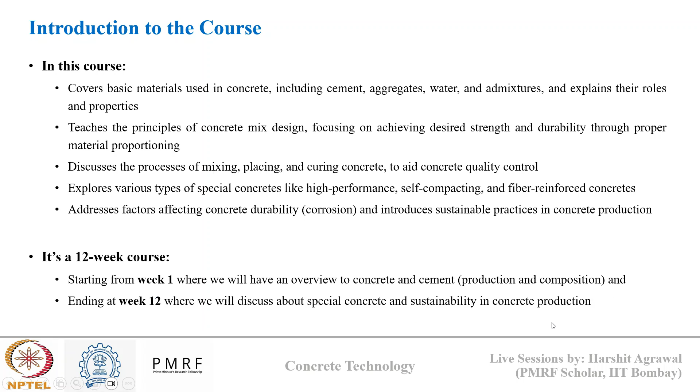It's a 12-week course starting from week 1, where we'll first have an overview of concrete and cement based on its production and composition, and we'll end with week 12 where we'll discuss special concrete and sustainability in concrete production.

So the course is divided into 12-week content. Week 1 is basics of concrete and cement. Week 2 will go on properties and testing of cement. Week 3 will be about aggregates and chemical admixture. Week 4 will be about mineral admixture. Week 5 and 6 will be about mixture design of concrete.

Then in week 7, we'll come into production and quality control. Week 8, we'll talk about mechanical properties of concrete. Week 9 will be about durability properties of concrete related to creep and shrinkage. Then in week 10, we'll talk about rebar corrosion.

Week 11 will come to special purpose concreting, mainly high strength concrete and self compacting concrete. In week 12, we'll talk about fiber and roller compacted concrete, and we'll talk a little bit on the sustainability point of concrete.

Okay, so let's start with week one.

We all are well versed with the fact that in the present world, concrete is the most widely used construction material, and there are facts which support this statement. Fact one: it is the second most consumed material on earth after water. Fact two: more than 5 billion tons of concrete is consumed every year.

Now, what makes concrete so special? Why is it used so much? It is because of its five key characteristics, which make concrete the most widely used material.

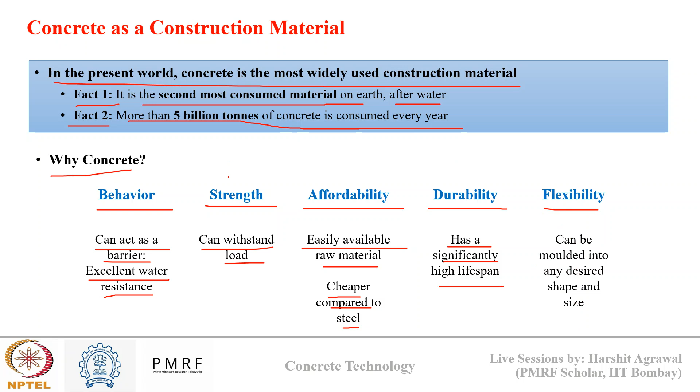Fourth, durability: it has a high lifespan, so any structure made with concrete has a very good life cycle. And fifth, flexibility: we can mold concrete into any desired shape and size, whatever we want. So these five key properties make concrete such a commonly consumed material.

Now when we talk about concrete, how are we defining it? What is concrete? Concrete is nothing but an artificial stone-like mass, which is made by mixing several materials - binding materials along with aggregates, water, admixture - in a specific proportion. When these materials are mixed together in a fixed proportion, we get a stone-like mass, and this stone-like mass is what is known as concrete.

If we write this as a formula, concrete equals binding material plus water plus fine and coarse aggregate plus admixture, which is an optional entity. In layman terms, concrete is a material which appears to be a flowable slurry kind of thing in the start, but over time it will harden and set into a definite stone-like mass, which can resist any kind of loading action as per requirement. So this is how we can define concrete.

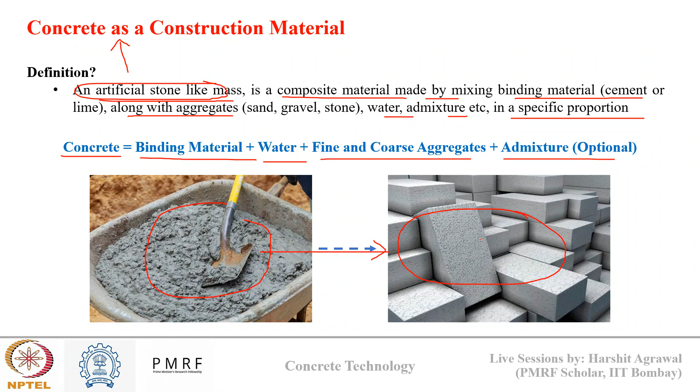Now, if we see different components of concrete - the binding material, water, aggregates and admixture - each component has a very specific role in concreting, and that's why studying each component separately is important to understand the composite action of concrete. So let's start with this equation of concrete as a mixture of binding material, water, aggregate and admixture.

In this, the binding material is the main element of the concrete mixture, and this gives us the strength that we need from concrete, and it binds all the ingredients of concrete together into a specific shape. The most commonly used binding material is cement.

Now, how does this binding material give strength to concrete? It reacts with water, which contributes in reacting with the binder as well. It provides the workability to make a paste which hardens over time, giving us this stone-like substance called concrete.

Now, apart from binding material and water, we have aggregates in concrete, which are inert material. So we use sand as fine aggregate, and we use crushed stones or gravels as coarse aggregates. What is the role of aggregate in concrete? They provide dimensional stability to concrete.

Why are we calling it dimensional stability? Over time we'll understand these things, like why there's a need of aggregate, why not just use cement and water - using cement and water we can make concrete. So over time you will understand the need of each of these components.

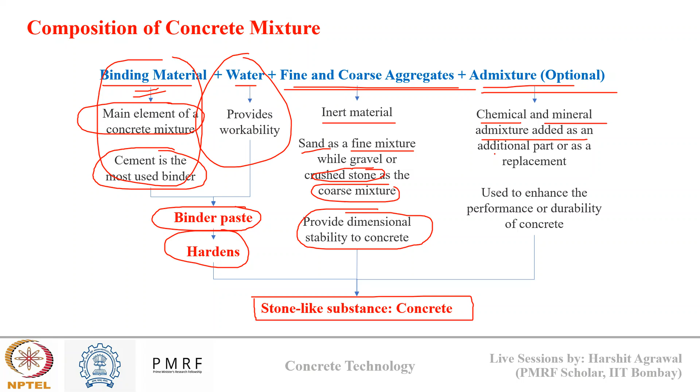Then there is an additional component known as admixtures, which are optional. There are chemical and mineral admixtures that are also added as a part or as a replacement of these materials, and they are used to enhance the performance or durability of concrete. Based on the type of concrete we want, the strength, the durability, or the purpose, we can adjust the proportions of these raw materials to get the final concrete product that we want. So all of these components combine together to make a stone-like substance which is known as concrete.

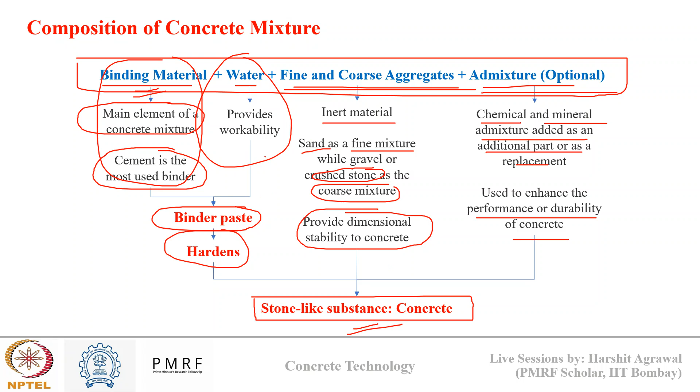Based on the proportioning of various ingredients used in concreting and the admixture content, we can classify concrete into different types. There is regular concrete, also known as plain concrete. Then there is reinforced concrete, high strength concrete, high performance concrete, self consolidating concrete, vacuum concrete, shotcrete, compacted concrete, glass concrete, asphalt concrete, rapid strength concrete, polymer concrete. Right now, as per the list, there can be 23 different types of concrete listed.

Among these listed concretes, the most commonly used is reinforced concrete. As we progress in the course, we'll understand that concrete is a brittle material. It has high compressive strength, but very low tensile strength. In actual application, the loading acting on a structure includes both compressive and bending or tension loads. Since concrete is weak in tension, we need some element inside concrete that can take the tensile load, and that's why we embed steel reinforcement inside concrete. So concrete takes the compressive load, steel reinforcement takes the tension load, and they combine to make a composite material used for construction purposes.

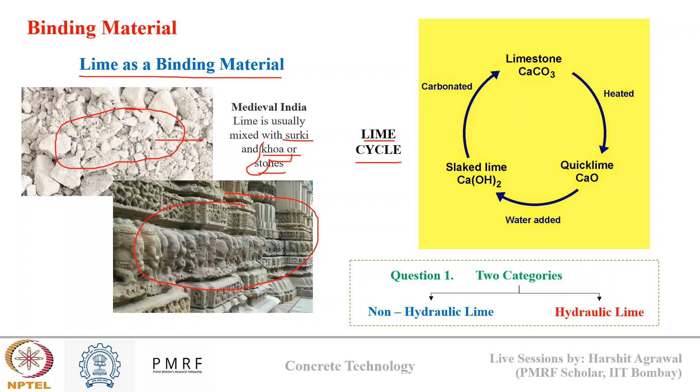All these medieval structures you see are made of lime mortars. So if we simply understand how lime was used as a binding material, we need to understand something known as the lime cycle. Lime as a binding material is produced through this lime cycle.

Limestone, which is a sedimentary rock present naturally, is heated up to 600 degrees Celsius to produce quicklime, known as CaO. In this quicklime, when we add water, it converts into slaked lime, which is Ca(OH)2. This slaked lime reacts with CO2 present in the atmosphere to harden back into limestone, which gives us the definite structures we want. Now, if we heat this limestone again, we'll form quicklime. So we can again produce lime, and this makes the cycle of lime durable, reusable, and eco-friendly in construction.

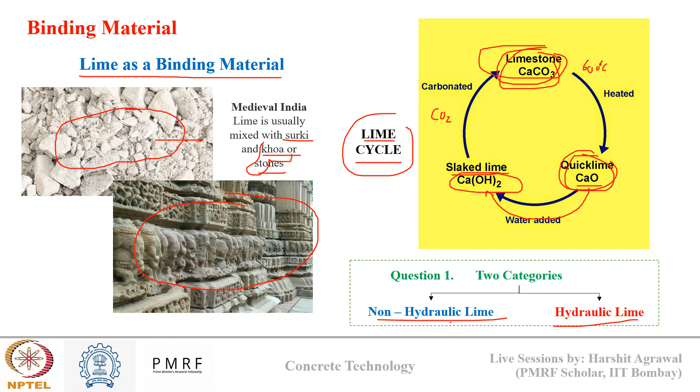Based on the source and reactivity of lime, there are two categories of lime: hydraulic lime and non-hydraulic lime. Can anyone tell me the difference between these two? What is hydraulic and what is non-hydraulic lime? Apart from this question, also think about these two extra questions: which of the following properties is the weakness of lime, and what is one of the modern applications of lime as a construction material? Just think about these three questions for discussion, and in the meantime, if you have any doubts, you can ask now.

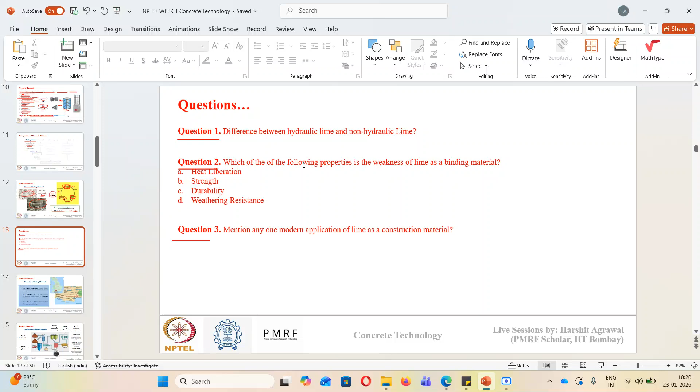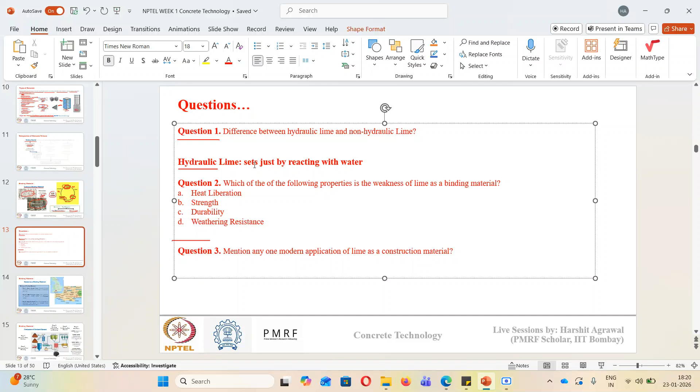Okay, so let's discuss the first question. The one who answered it was correct. So when we talk about hydraulic lime, it is something where it sets just by reacting with water. It can also set by carbonation, but it sets also by reacting with water. How? Because it has certain impurities present in lime which can make lime react with water and form certain products which can gain strength over time. This was something which was used as a basis for the production of modern cement. This hydraulic nature of lime gave the idea behind the making of modern cement.

And then there is non-hydraulic lime. As the name suggests, non-hydraulic lime is something which won't set just by reacting with water. It sets only by reacting with CO2 in air, forming CaCO3. So this is the difference between hydraulic lime and non-hydraulic lime.

Second question: which of the following properties is the weakness of lime as a binding material? Can anyone tell me? See, weathering action will be the common answer for everything, for every kind of binder material. Weathering action is a weakness for lime also, cement also. The one weakness that was discovered for lime, why lime was discontinued, why cement came, why we are not using lime now also, why there was a need to produce cement.

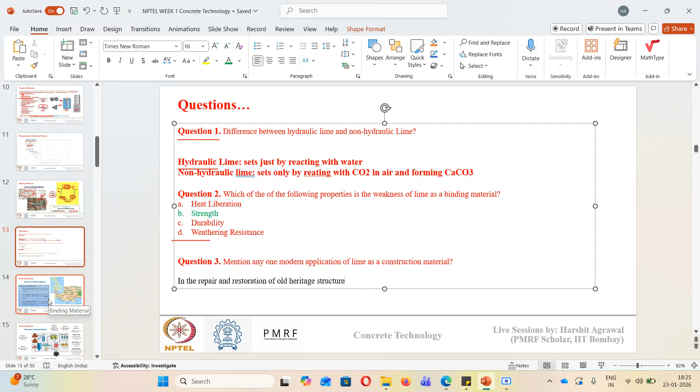Okay, now after lime, let's move on to cement as a binding material.

Let's first explore the history of Portland cement, how it came about. The history of Portland cement is made of three key facts. Fact number one: Louis Joseph Vicat. In the early 19th century, this scientist first prepared Portland cement by mixing limestone and clay, which laid the foundation of the modern cement we use today.

Then in 1824, a scientist named Joseph Aspdin patented this hydraulic cement. So first we talked about hydraulic lime, from which the idea of cement came, and then Joseph Aspdin patented this idea of hydraulic cement, which was termed Portland cement later on.

Why the name Portland? It was chosen because the cement resembled the properties of Portland stone, a type of limestone present in a region known as Dorset in the UK. On the map of the United Kingdom, there is a region called Dorset, and within Dorset there is an area named Portland. The limestone present in this area resembled the properties of the cement that Joseph Aspdin patented, so it was named Portland cement. This is how the name came about.

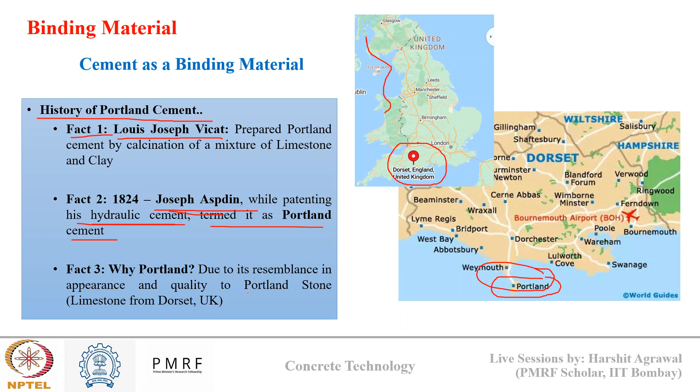Now in the modern age, how do we produce Portland cement? In cement production there are five key stages. Stage number one is the crushing of raw materials.

It all begins with crushing of raw materials like limestone and clay, along with some impurities of iron oxides. Once crushed, they are stored in raw mill silos, which are big storage bins you can see on cement production sites.

Then the second step is grinding, proportioning, and blending of the raw meal. The crushed material that we have stored is now ground and blended in precise proportion, in specific quantities, and then blended to create a homogeneous mixture.

Then the third stage is preheating of raw meal. Once this mixture is proportioned, it is preheated using hot gases in a preheater tower. The need for this preheater tower is to reduce energy consumption in the next stage of cement production, so initially the material is preheated before sending it to the actual heater.

Now the fourth stage is the kiln phase, the main phase of cement production. The preheated material from stage three is heated to a high temperature in this rotary kiln, where all the chemical reactions take place to form the final product, known as clinker.

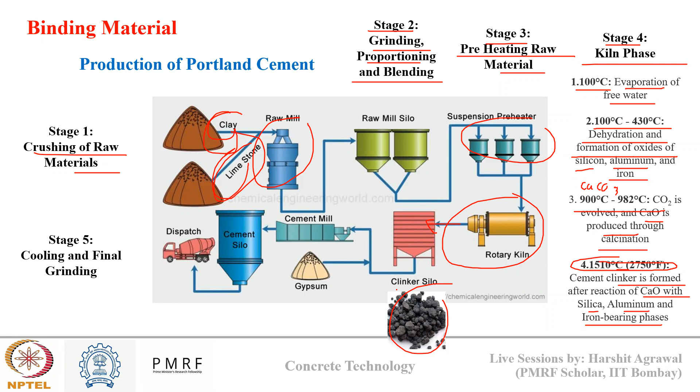Once we get out of the kiln phase, stage five is cooling and final grinding. The clinker from the rotary kiln is cooled down, gypsum is added to the cooled clinker, and it is again ground into fine powder, which is known as cement. This is stored in big containers known as silos, and it is dispatched for packing and production.

So this is the entire cycle of production of cement: starting with crushing of raw materials, grinding, proportioning, preheating, kiln phase, and final cooling and grinding. This cooling phase is very important; later on we'll see its importance through one question.

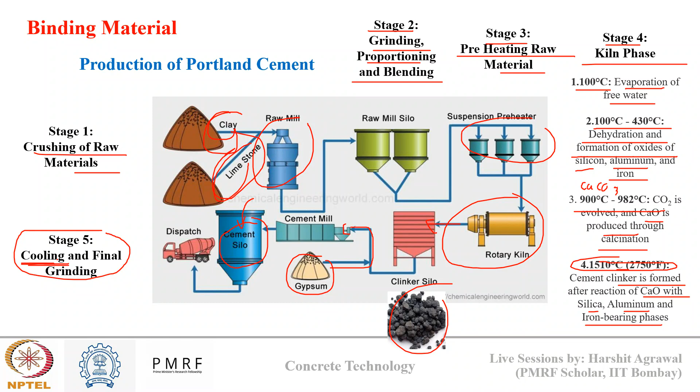Now, since we have talked about both cement and lime and how they are produced, try to answer these two questions: what is the difference between hydraulic lime and cement? Hydraulic lime also reacts with water and sets; cement also reacts with water and sets. So what is the difference between the two then?

No, it is not like that. We need to heat lime to decompose it to use it again. It is not like if we add water again, lime will decompose. Because CaCO3 is formed, and CaCO3 can't react with water, so we can't make it active again.

Degree of setting, hmm, not the answer I am looking for. Hydraulic lime sets so slowly, whereas cement sets fast. Can you tell me the reason? Although we'll discuss this later on, but still.

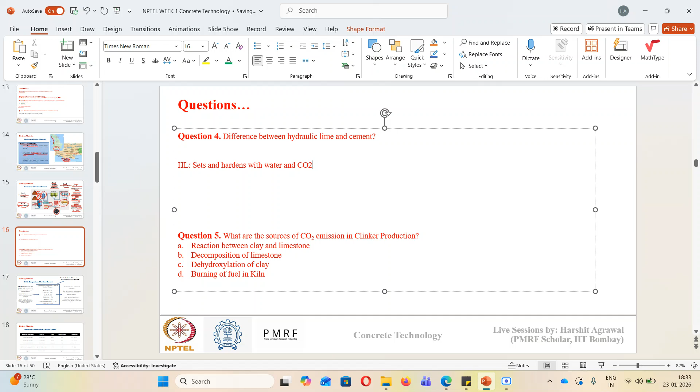So when we talk about hydraulic lime, we know it sets and hardens with water and CO2, both can make hydraulic lime set. Whereas when we talk about cement, it sets because of the hydration reaction with water. That is the only source for cement setting.

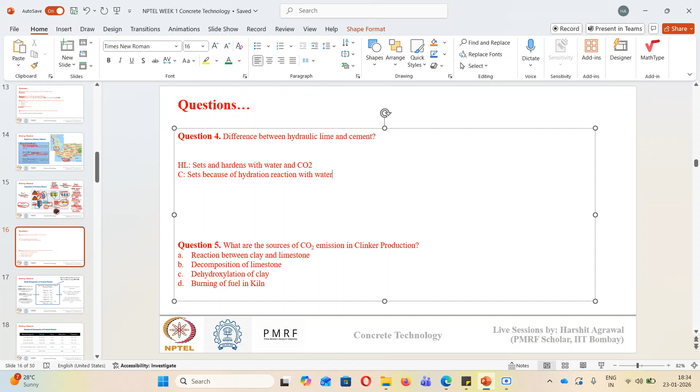Now, one more point that is very important to understand about hydraulic lime is how it is produced. Hydraulic lime is produced by heating limestone and clay till 700 to 800 degrees Celsius only, whereas in cement, we are heating limestone, clay, and impurities till 1500 degrees Celsius.

And this is very important. This is the point which makes limestone, hydraulic lime, and cement differ from each other. Because when we heat it till 700 to 800 degrees Celsius, the oxide composition that we get in hydraulic lime is different from the composition we get in cement.

So I will just give a hint on this. In hydraulic lime, we get C2S as the major component, whereas in cement we also make C3S. This C3S is responsible for early strength, whereas C2S is responsible for slow strength gain. That's why hydraulic lime has slower strength gain over time, whereas cement has faster strength gain initially also.

So this point we'll see later on also, what is C2S, what is C3S, and everything. But for now, just to answer this question, just remember this point: it is about the way hydraulic lime is produced and the way cement is produced.

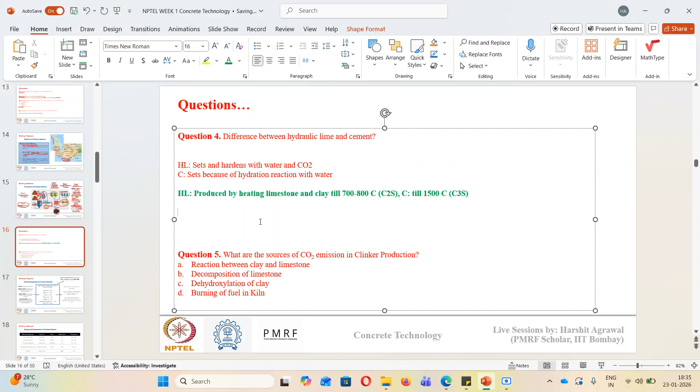And the third point, which was told by someone, is that hydraulic lime has lower strength compared to cement. So these three key points are there when we compare hydraulic lime and cement. And why, what is the reason behind this lower strength? Again, this composition, C2S and C3S. So later on when we talk about hydration of cement, it will be clear to us.

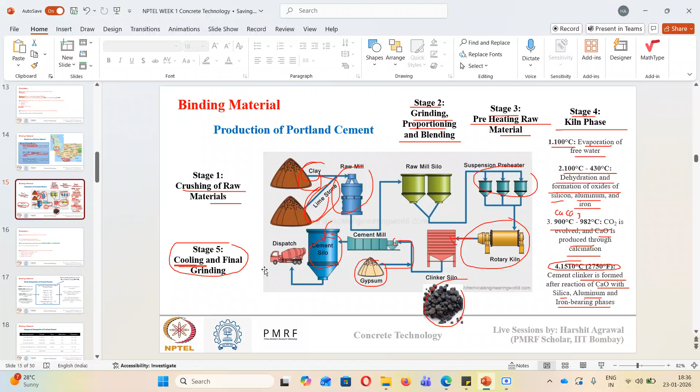So just try to answer the fifth question now: what is the source of CO2 emission in clinker production? When we talk about this production phase, from where is the problem of CO2 emission coming? We talk a lot about replacing cement with certain sustainable materials. What is the problem with clinker production which makes cement such a hazardous material for nature? From where is that CO2 emission happening?

What is the age of cement, and is there any benefit of fresh 1 week old cement compared to older cement?

Old cement will be carbonated initially, so it won't react with water that efficiently, and fresh cement, it is less so. Old cement will be hydrated, not carbonated, sorry, it will be hydrated. So what happens is, if we leave cement open in ground or open to atmosphere, it absorbs water from the atmosphere and it hardens. Once it has hardened, it won't have the ability to bind material together because it has already absorbed water and hardened.

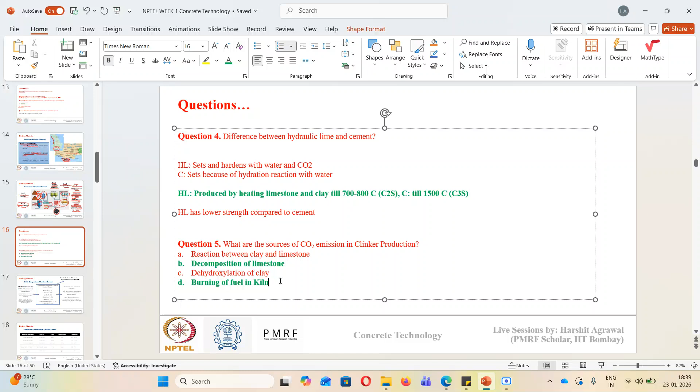Let's go back to this question. Yes, the correct answer is B. Decomposition of limestone releases CO2, and the burning of fuel in the kiln phase also releases CO2. These two are the major problems when we talk about cement production, and why we are looking for replacement of cement, because of these two reasons. They are the major contributors to CO2 emission in the world right now. And to reduce the use of cement, we are going towards sustainable construction practices.

Now to understand the chemistry behind what we obtain from this kiln phase, what we call clinker, we need to understand the oxide and compound composition of Portland cement. After passing through the kiln phase, limestone and clay, upon exposure to higher temperature, form different oxides of calcium, silica, and aluminium. Limestone is the source for calcium, and clay is the source for silica and aluminium. Along with this, we also add some iron impurities in the initial raw mixing, which is the source for iron oxide. So all of limestone, clay, and impurities, upon exposure to high temperature, convert into different oxides of calcium, silica, aluminium, and iron after liberating CO2 and water.

For Portland cement, the general composition of oxides present in the clinker is of this order: calcium oxide is around 60 to 67%, silica oxide is around 17 to 25%, alumina oxide is 3 to 8%, iron oxide is 0.5 to 6%, magnesium oxide is 0.5 to 4%. There are alkalis present, which is 0.3 to 1.2%, and there are sulfates also, SO3, present in the range of 2 to 3.5%.

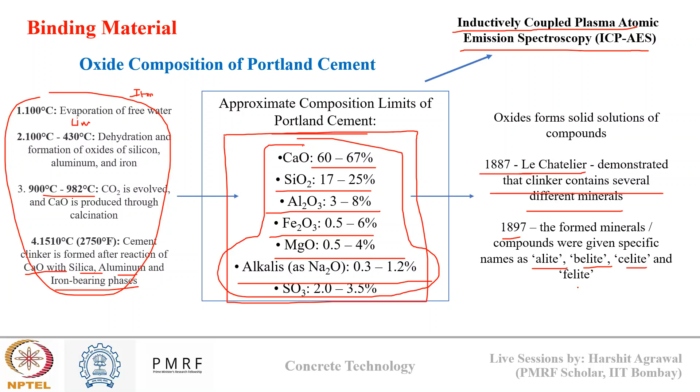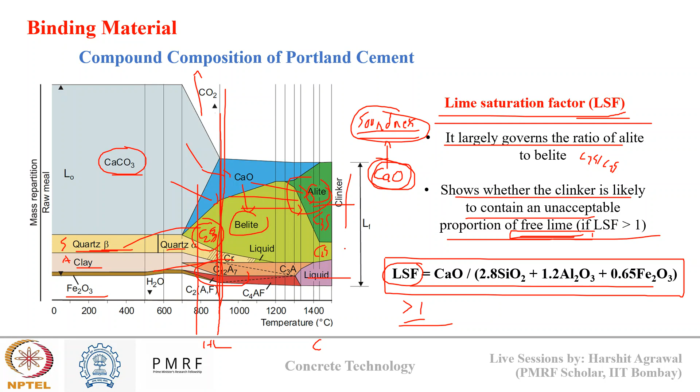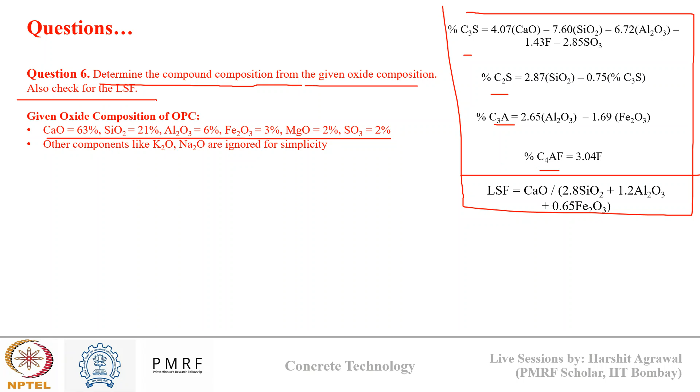Okay, so just give it a try. How to use this equation? I have a question for you now, where you need to determine the compound composition of the cement for the given oxide composition. This is the oxide composition that I have given you. Use these sets of equations and determine what will be the proportion of C3S, C2S, C3A, and C4AF. Also check the lime saturation factor - is it greater than 1 or less than 1?

So just do this calculation quickly, and in the meantime if you have any doubt in the discussion we had till now, you can ask.

Okay, I see multiple questions.

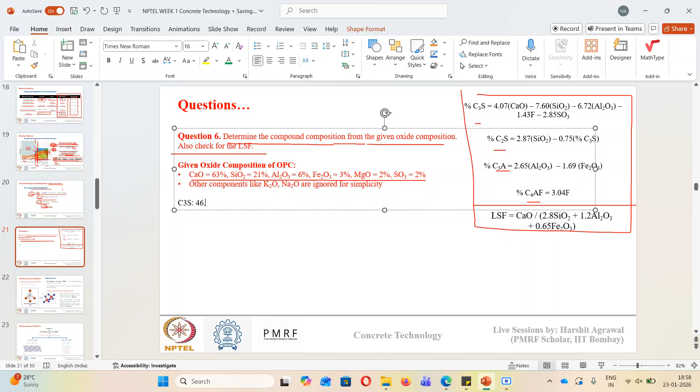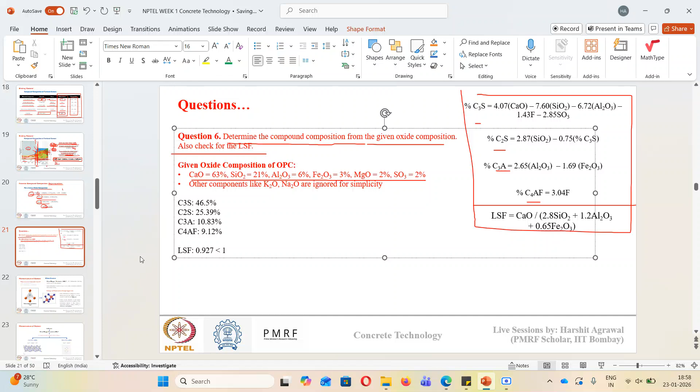Lime saturation factor is correct, it is 0.927, between 0.92 to 0.93. For this question's calculation, I will just write the answer here, and you can do the calculation later on and verify. So C3S content will be around 46.5%, C2S content will be around 25.39%, C3A content you will get around 10.83%, and C4AF content will be around 9.12%. Lime saturation factor comes out to be 0.927. Since it is less than 1, we can say that the cement batch is suitable for use.

Now let's move ahead and try to understand what is happening inside cement and how it hydrates. Till now we know the composition of our Portland cement. Now we have three critical questions that we need to answer.

First, why are certain compounds formed? Why is C3S forming, why is C2S forming, why is C3A forming? Then, why is cement reactive - what is the reason which makes cement react with water? And then, how does cement react with water? Answering these three questions will clear all the major doubts that were asked recently. So to understand them, we need to understand the microstructure of cement.

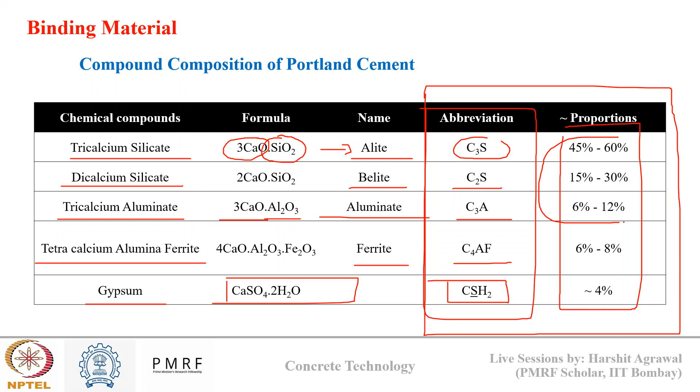First we'll start with why certain compounds are formed. Now we know that cement mainly has two phases, silicates and aluminates. So we saw C3S, C2S, and we saw C3A. In this proportioning chart, we can see the major proportion is occupied by these two phases, silicates and aluminates. So let's first talk about the silicates, C3S and C2S.

When we talk about silicate structure, silica is in the form of silica-oxygen tetrahedra, SiO4 4-negative. This is the fundamental building block for all silicate minerals. Each tetrahedron has one silicon atom, which is covalently bonded by four oxygen atoms, and it has a free charge of -4.

In this tetrahedral structure, there are four unbalanced charges present right now. The presence of these unbalanced negative charges on the oxygen atom leads to the ability of silica to show linkage and polymerization through oxygen bonds. A system will be stable when all charges are balanced, so this silica tetrahedra will try to balance its unbalanced charges, and for this reason it shows linkage and polymerization - multiple chains of silica will try to link with each other.

This single unit is known as a tetrahedron. If this tetrahedra arrange in three-dimensional space in a periodic pattern, we get a crystalline material. So if this is arranged regularly in 3D, we'll get a crystalline material like quartz, which won't be reactive.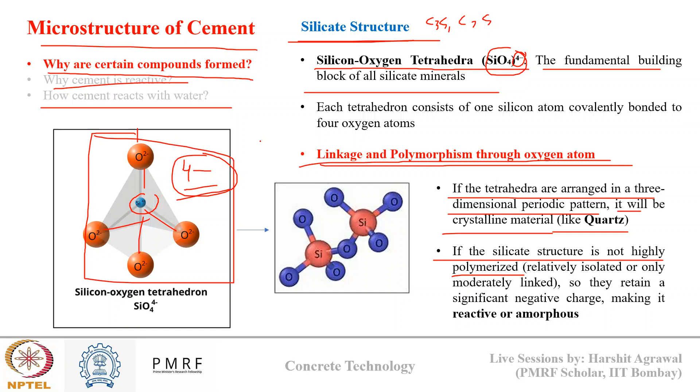However, if this silicate structure is not highly polymerized, if it is not regular along all three directions and remains relatively isolated or moderately linked, not completely linked, then it will have some negative charge still unbalanced. The presence of these unbalanced negative charges make silicate reactive and amorphous. Anything which is reactive is known as amorphous in nature, and anything which is not reactive is crystalline in nature. When we talk about sand, it is also composed of silica.

But sand is not reactive because it has a 3D structure of silicate - this silica tetrahedra is present in three-dimensional space, arranged in three-dimensional space, and this polymerization is 3D in nature, that's why it is crystalline material. However, in cement, the silica tetrahedra is not 3D in nature, which makes it amorphous. There are still unbalanced charges present on the silicate mineral, which makes it reactive towards calcium.

So if we try to understand what cement chemistry is, how it is fundamentally controlled by the silica tetrahedra and its arrangement and charges, then the next question we need to understand is why C3S and C2S are formed.

We know that there are negative charges which are unbalanced on the silica tetrahedra. These charges must be neutralized by some compound to form a stable phase. In cement clinker, the calcium ions balance these negative charges. In belite, there are two calcium ions giving us +4 charge, which balances the -4 charge present on the silica oxygen tetrahedra, resulting in the formation of C2S. You can see this is silica, these are four oxygen atoms with four negative charges, two grouped with calcium, other two grouped with calcium, and we get C2S.

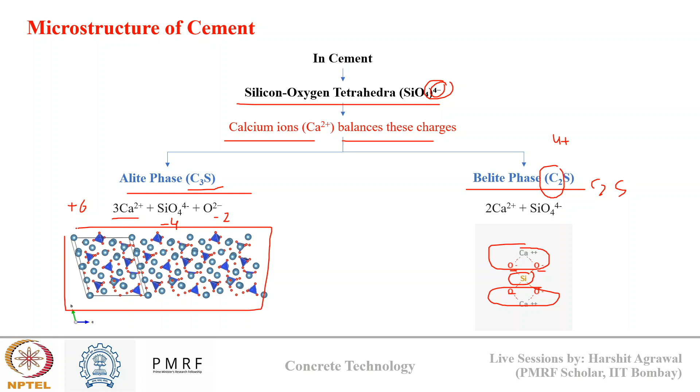The structure of calcium alite is a little complex. It is not very oriented, it is distorted, and it is imperfect in nature. There are multiple sites which are amorphous in nature, and they have poor packing at the structural level, which makes C3S unstable. That's why it is formed at very high temperature, and why it is more reactive towards water, because it is still unstable - not perfectly balanced, not perfectly oriented, it has multiple orientations and multiple structures present in its nature, which is the reason why it forms at very high temperature and why it is very reactive towards water.

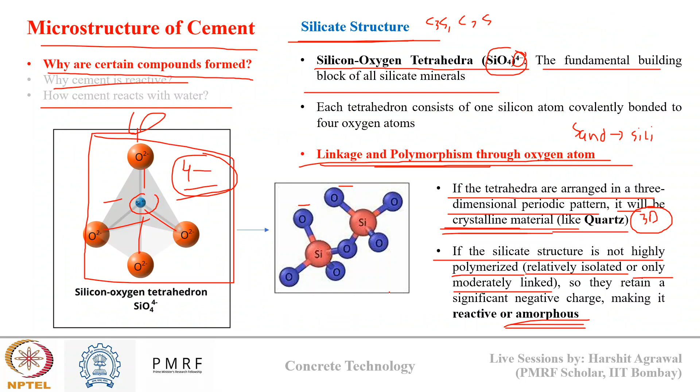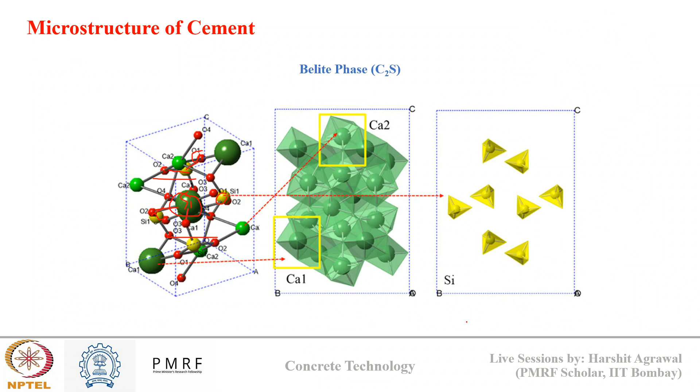So more the polymorphism, more the crystallinity in the system, lower will be the reactivity. Lower the polymorphism, more the reactivity, because more is the amorphousness in the system. That is the difference between aluminates and silicates, and within silicates also between C3S and C2S.

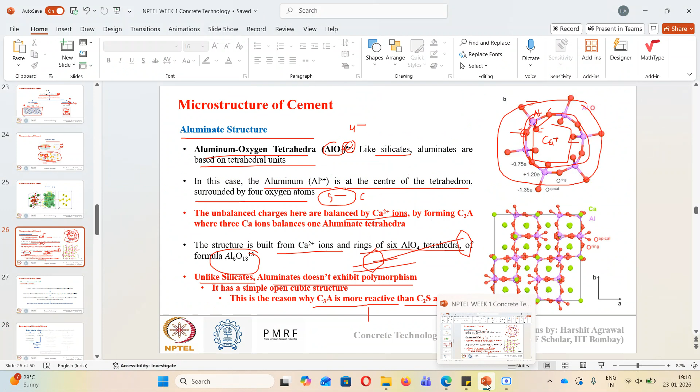Is everyone clear with this atomic structure and how it is oriented? I'll suggest you listen to this lecture once again so you get more clarity about what I have spoken. Any doubt in this part? This PDF will be available to you.

Polymorphism means linkage of each unit. So here, this is one tetrahedra, one silica tetrahedra, one unit of SiO4 4-negative. Now to balance this 4-negative charge, what happens? This oxygen links to another silica. Then there are oxygens of that silica. This oxygen links with another tetrahedra unit, then this oxygen links to one other silica, and so on. So this linkage of each single unit is known as polymorphism.

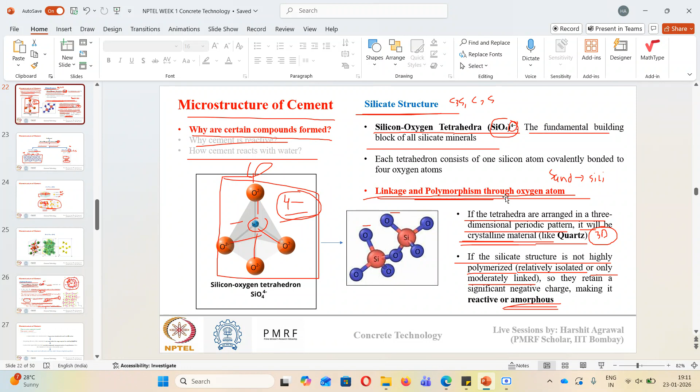The role of gypsum we'll understand slowly when we talk about hydration of cement.

When we talk about composition, we give a range, not very specific values like 50%, 40%, 30%. There is a range in which cement composition can vary. So if C3S content should be in the range of 40 to 60%, some cement company will manufacture cement with C3S at 58%, while some will manufacture cement with C3S as 44%. That's why differences come from company to company, and that's why grade differences also come. F is for Fe2O3 in that equation.

Polymorphism will reduce the reactivity. Why is sand also made of silica, but it is an inert material that doesn't react with water? Because of the 3D polymerization present in sand. Sand has a silicate structure with polymerization in a 3D network, which makes it very less reactive. When something is not reactive, we call it crystalline in nature—crystal means it has a perfect structure, perfect polymorphism in 3D. That is a crystalline material. Amorphous material is something which has unbalanced charges, which gives it the ability to react. Cement has the ability to react, while sand doesn't.

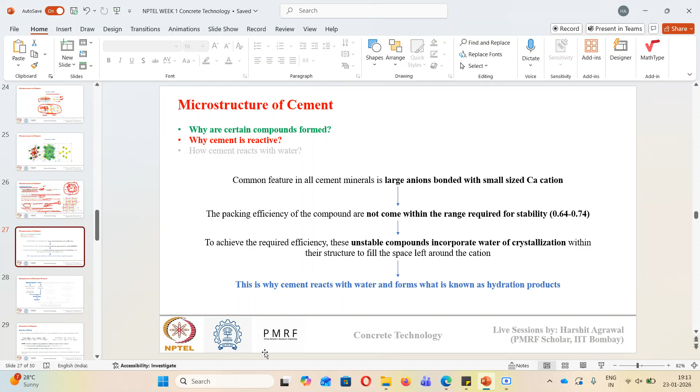Okay, that was the first question. Now we know how certain phases are formed, why C3S is forming, why C2S is forming, why C3A is forming. But why are they reactive? Why is cement reactive? That is the second question we need to answer.

If you see, one common feature in all cement minerals is that it has large anions bonded with a small cation. So we have SiO4 4-negative units or AlO4 5-negative units which are bonded to Ca2+ cations. These are large anions and this is a very small cation. So if we see the atomic size, the anion has a very high size, while the cation has a comparatively much smaller size.

Due to this large anion, if we see a simple cubic structure, these anions occupy the corner positions of the cubic unit. Due to their larger size, they hinder the packing of each other—they won't allow the anions to pack close to each other. Since they don't have good packing efficiency because of their larger size, the packing efficiency of the compound that is finally formed won't come in the required range of stability. To form a very stable compound, we need a packing efficiency of 0.64 to 0.74. Due to the presence of large size anions, the packing efficiency is lower than this, and this is why cement becomes reactive. So how does cement improve its packing efficiency?

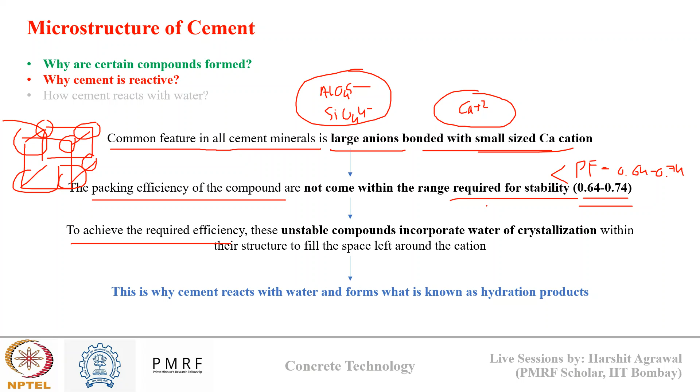To achieve this efficiency, these unstable cement compounds incorporate water of crystallization. Cement reacts with water to fill the spaces left over between cations. This reaction of cement with water, and this incorporation of water of crystallization, produces what is known as hydration product, and the reaction itself is known as hydration reaction. So the main reason is to improve the packing efficiency. Due to the presence of large anions and small cations, there are a lot of spaces left within a unit cell which are not occupied, reducing the packing efficiency. To improve on that efficiency, cement reacts with water to form hydration products.

The entire unit, C3S, C2S, they are not stable phases. They have very low packing efficiency, and that lower packing efficiency makes them reactive towards water because they want to achieve stability. Every atom always wants to achieve the lowest energy state, and that lowest energy state is achieved when they have the best packing efficiency. So to achieve that state, cement reacts with water. Its amorphousness decreases when it reacts with water to form a stable compound.

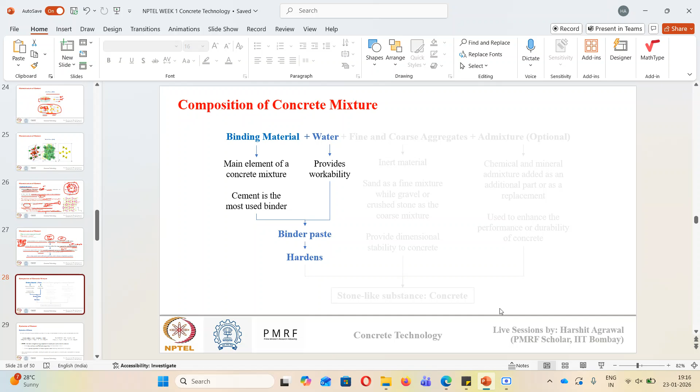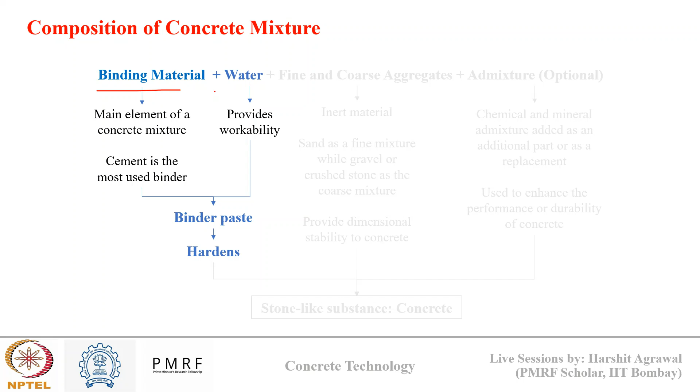So now we have seen why certain phases are formed and why those phases are reactive towards water. The next thing in our story will be how cement and binder material react, and how this hydration reaction happens. So first we'll see hydration of silicates.

When we talk about silicates, we have C3S and C2S. When they react with water, they produce calcium silicate hydrate and calcium hydroxide. C3S reacts with water to form CSH and CH: 2 moles of C3S combine with 6 moles of water to form 1 mole of CSH and 3 moles of CH. In terms of quantity, 100 grams of C3S requires 24 grams of water to produce 75 grams of CSH and 49 grams of CH.

Whereas for belite, C2S: 2 moles of C2S react with 4 moles of water to form CSH and CH. So 100 grams of C2S will require 21 grams of water to produce 99 grams of CSH and 22 grams of CH. So we can see here there are two hydration products forming: CSH and CH.

CSH, calcium silicate hydrate, is the main strength bearing compound in cement paste and in turn concrete. When we talk about the strength of concrete, how cement contributes towards that strength, it is due to the formation of CSH. The more CSH in the concrete, the higher the strength of concrete. Now why is this written as C dash S dash H, and not as CSH?

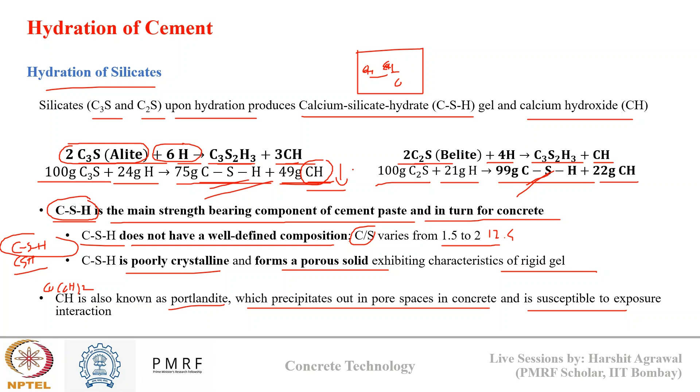Now, in case of hydration of aluminates, we have just studied that C3A is very reactive due to its lack of polymerization and open cubic structure. So the reaction of C3A with water is very volatile in nature because it is highly reactive, and it leads to immediate stiffening of cement paste. When we add water to cement, the first composition of cement which reacts with water is C3A, and it causes stiffening — it will make the cement paste very stiff. This is also known as flash setting.

How does it happen? The C3A combines with water to form C3AH6, calcium aluminate hydrate. So 100 grams of C3A combines with 40 grams of water to form 140 grams of calcium aluminate hydrate. And this calcium aluminate hydrate gives rise to flash setting. So you will see, as soon as I add water to cement, it will instantaneously start to set.

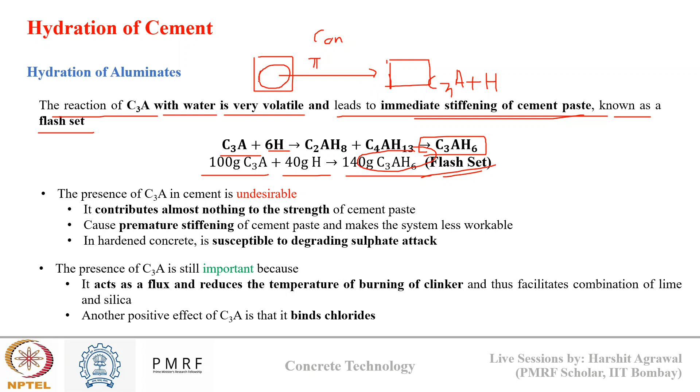And why is it a problem? Because when we talk about concreting, we mix concrete at a certain location and pour it at a different location. There are cases when we need to transport the concrete from one place to another. If my concrete sets instantaneously, this transportation becomes a problem. If it is already set, we won't be able to pour it into big molds, and it won't be able to flow and cover the entire space inside the mold to form a definite shape that we want.

So that's why we don't want flash setting to happen in concrete. It should remain workable for some time, and then after 24 hours, or after one day, it should start to set and gain shape. We need concrete to be workable until we have transported it to site and poured it inside the formwork. And that's why this flash setting becomes an issue.

So the presence of C3A is undesirable because it is not contributing towards strength. We can't see the formation of CSH happening. It causes premature stiffening of cement paste, which makes cement less workable because of flash setting. And in hardened concrete, it is susceptible to degradation due to sulfate attack. We will see this later on.

However, even knowing that C3A is a problem, why is C3A present in cement composition? Because it acts as a flux and reduces the burning temperature of clinker. So when we talk about clinker production in the kiln phase, the presence of C3A reduces the temperature required to form C3S, that 1500-degree mark. If there is no C3A, we would need to increase this temperature maybe to 1700, 1800 degrees Celsius to combine lime and silica. So that's why we say C3A acts as a flux.

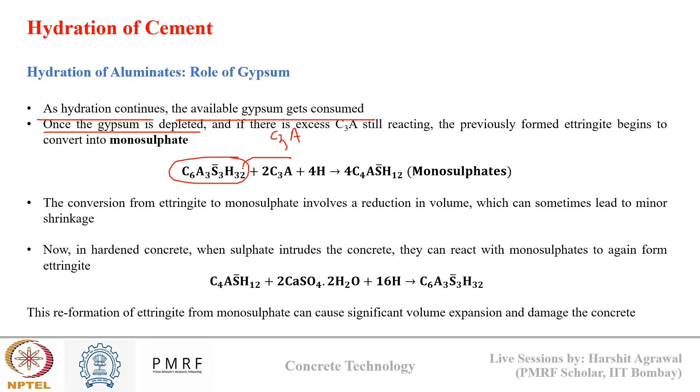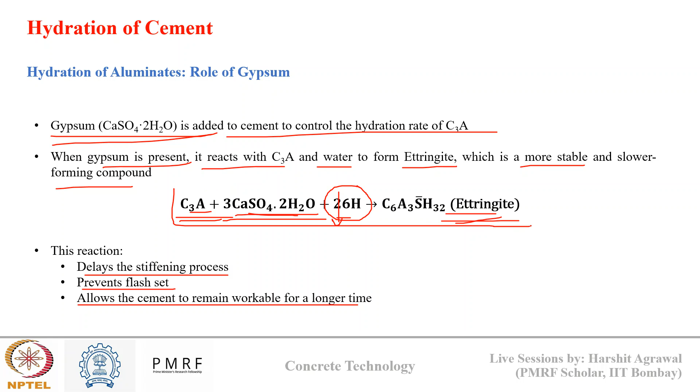So ettringite converts into monosulfate, which is again calcium alumino sulfo hydrate, but with a different composition. This conversion of ettringite to monosulfate involves a reduction in volume. So suppose its volume was 1 meter cube, the volume of monosulfate will be around 0.8 to 0.9 meter cube. So there is a reduction in volume happening due to this reaction, which can lead to some shrinkage problems. But the important thing is that this reaction, which was causing flash setting in cement, is now delayed due to the presence of gypsum.

This reaction happens later on, not in the early stages. Now in hardened concrete, suppose monosulfates are present. What happens if sulfate ions come inside concrete from external sources? This monosulfate can again convert back to ettringite, involving expansive reactions. Since ettringite to monosulfate conversion led to volume reduction, monosulfate to ettringite conversion will bring volume expansion in nature.

So if we have hardened concrete and there is volume expansion happening inside, it will give rise to cracking in concrete, which is not desirable. This is known as sulfate attack.

Later on we'll see in the course this part we talked about right now. It is known as sulfate attack, which is a durability issue for concrete. In week 9 or week 10 content, we will again touch upon this point. What is sulfate attack? It is the conversion of monosulfates into ettringite in hardened concrete state, which gives volume expansion and damages the concrete.

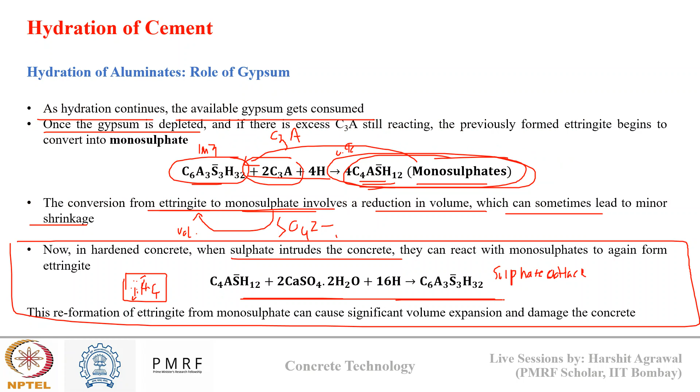Now, based on this understanding of hydration of aluminates and hydration of silicates, try to answer these two questions. In the meantime, if you have any doubt regarding hydration of cement, you can ask. You will get the recording of the session.

Don't worry, just answer these two questions right now. What is the difference between flash setting and false setting? You might have heard the term false setting also occasionally. What is the difference between the two? Also think about the second question: from a durability point of view, which clinker phase is important, C3S or C2S? I have shown you the hydration products which are forming, so think about that reaction and the products forming, and tell me the answer.

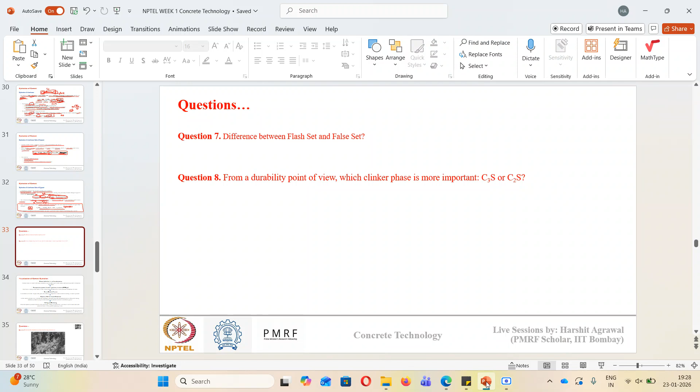Can anyone tell me the answer for the first question? What is the difference between flash set and false set? What do you mean by flash setting? Tell me that first.

You can unmute and speak also if anyone wants to. If you remember, initially during cement production, we said that clinker is first cooled and then it is blended and grinded with gypsum to form cement. Just think about that part. Why is clinker cooled before addition of gypsum?

Flash setting, we know, is quick setting. Why? Because C3A reacts with water to form CAH, calcium aluminate hydrate. This reaction consumes a lot of water immediately. Suppose you have added 1 kg of water during concreting, and there is no gypsum present in cement. C3A present in cement will consume a lot of water - from 1 kg, suppose it consumes 500 grams of water to form calcium aluminate hydrate.

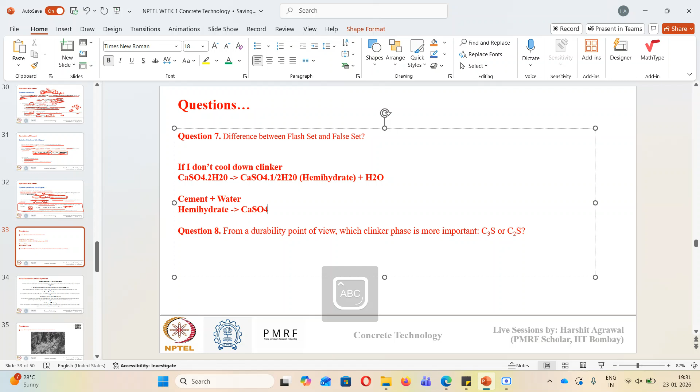Now this hemihydrate is there in my cement. When I add water to cement, this hemihydrate will first convert into gypsum, CaSO4 dot 2H2O. Since this reaction consumes a little bit of water, it will appear that the cement paste has set. This is known as false setting - conversion of hemihydrate into gypsum when water is added to cement.

Why is it known as false setting? Because if we again do remixing of cement without addition of water, this gypsum will again break into hemihydrate and water. So it appears to be set, but upon remixing it will again become free - that's why it is known as false setting. False setting comes because hemihydrate converts into gypsum. That's why we say that before addition of gypsum to clinker, clinker needs to be cooled down so that this reaction doesn't occur.

Everyone clear with the concept of false setting?

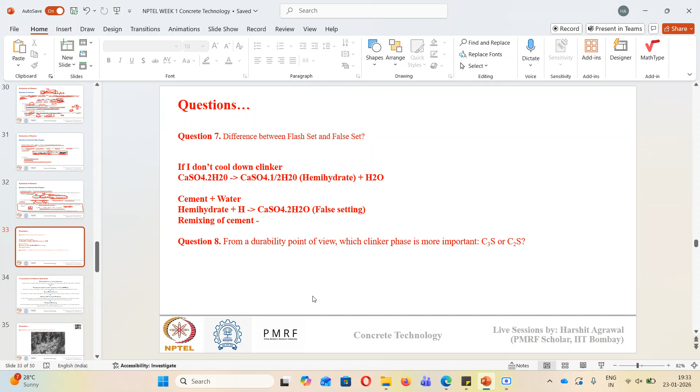Second question: from a durability point of view, which clinker phase is more important? Let me copy the two equations for you - this is the hydration of C3S, and this is the hydration of C2S.

We talked about two hydration products, CSH and CH. Which of them is undesirable to us, CH or CSH? CH is undesirable. So if there is more formation of CH, there are more chances that later on CH will give rise to durability issues. So for durability, C2S is more important because it produces less CH content per 100 grams compared to C3S - almost half the CH is produced due to C2S for the same amount of phase.

However, from a strength point of view, C3S is more important for early strength gain. Why? Because C3S reacts readily, while C2S takes time to react. So if we want early strength, we need more proportion of C3S in a cement.

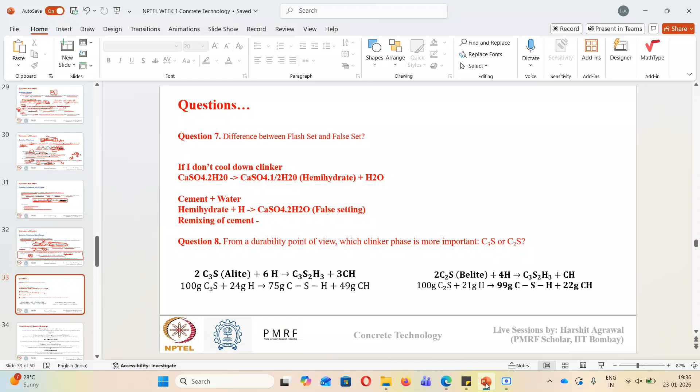So these are the answers for these two questions. Now, knowing about cement hydration, let's see a flowchart that describes the process, how it is actually happening on a larger scale. So far we have seen everything from a microstructure point of view - what about on a larger scale, how does it happen? When we talk about cement hydration, it is a surface phenomena.

So this is my cement grain, this is water. Hydration starts from the surface of cement. When cement comes in contact with water, the hydration reaction happens at the surface, and hydration product forms at the surface of the cement grain. Which hydration product am I talking about? I am talking about CSH gel. This CSH gel forms on the surface of the cement grain and produces a semi-permeable membrane for water. So inside I have unreacted cement, but there is a membrane of CSH that has formed over the cement grain, which acts as a barrier for interaction of water with the unreacted cement inside.

Now what happens? This gives rise to osmotic pressure. The concentration of solute is higher inside the cement grain compared to outside. Unreacted cement is very high inside and very low outside, while water is high outside and low inside. So there is a concentration gradient developed due to this layer of semi-permeable membrane formed over the cement grain. Once this pressure rises above a critical limit, what happens?

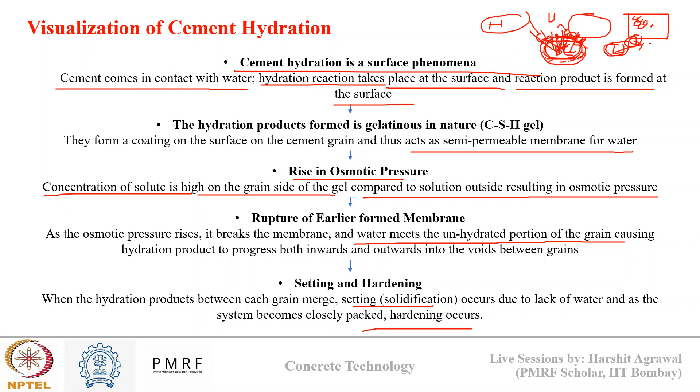From the surface, hydration starts, then osmotic pressure rises, then this semi-permeable membrane formed on the surface breaks, water moves inside, certain phases start to move outside and dissolve in the system, and hydration deepens inside. There is binding of different cement grains that starts to happen, and then the binding of the entire system happens.

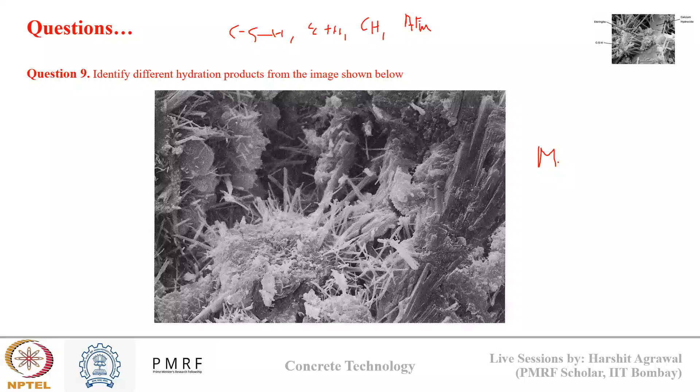Okay, so when hydration occurs, we see there are different hydration products which are formed: CSH, ettringite, calcium hydroxide, and monosulfates. This is a little bit out of course, but I just want to show you at microstructure level, after hydration, how these hydration products appear.

So in this image, you have four different kinds of products that you can see. This is a scanning electron microscope, SEM image, of a 7 day old hardened cement paste, at a magnification of 3500. There are different cement hydration phases that are present in this image.

So can anyone tell me if you have any idea about how CSH will look, how ettringite will look, how CH will look, and how AFM will look under microscope? Any guesses? This is just an additional learning, I guess it was not part of the session you have seen, but just to tell you how we'll see the paste in microstructure. Any idea? You can make guesses if you want.

Okay, I will just tell you the answer for this because I don't think it will be clear for you to answer. So you see this, at the bottom, this gelatinous material that is present here. This is CSH. And these needles that you see around CSH... where is my mouse? Just a second.

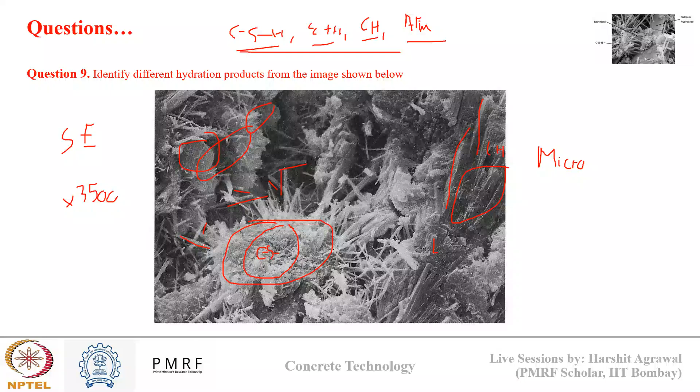Okay, this is CSH, and these needle kind of things that you are seeing here, these are known as ettringites. The plate-like structure that you see here, these are all AFM, monosulfoaluminates. And these crystalline kind of things that you see here, these are all calcium hydroxide. So on microscopic level, when we see cement hydration, we can identify different hydration phases like this. This is how we can judge. You can read more about this, but I just wanted to give you the basics of what SEM is and how cement paste appears in SEM.

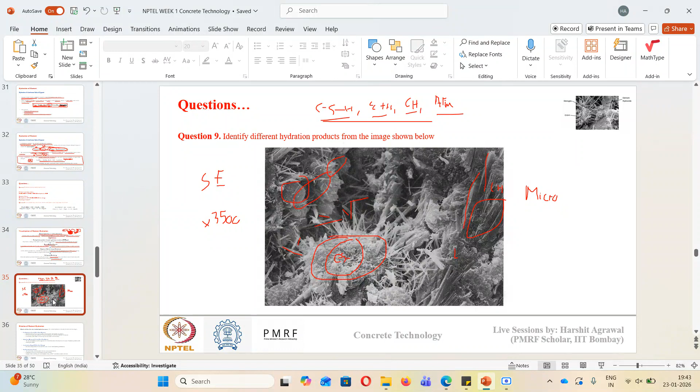Okay, so till now we talked about cement hydration. The next is the kinetics of hydration - by kinetics, we mean at what rate hydration occurs. When we talk about hydration kinetics, it involves four stages. There is the pre-induction period, the first few minutes, where there is rapid dissolution of ionic species like sodium, potassium, and sulfates. C3A starts to dissolve and react with gypsum to form ettringite, and there is a little bit of CSH formation that also happens on the grains of C3S. So this is the pre-induction period.

Okay, then there is the dormant period, where this early rapid hydration slows down due to deposition of a CSH layer on the cement grain, which gives rise to the semi-permeable membrane that we talked about.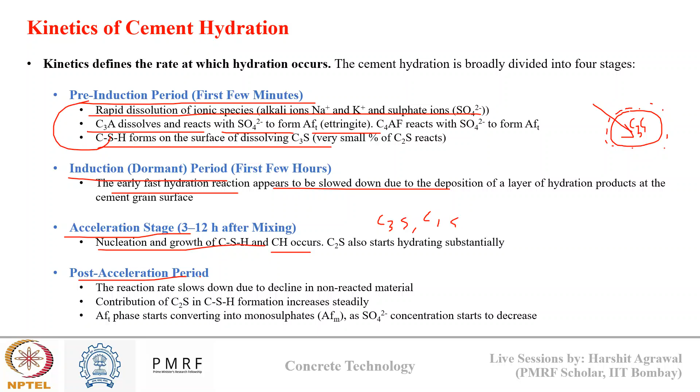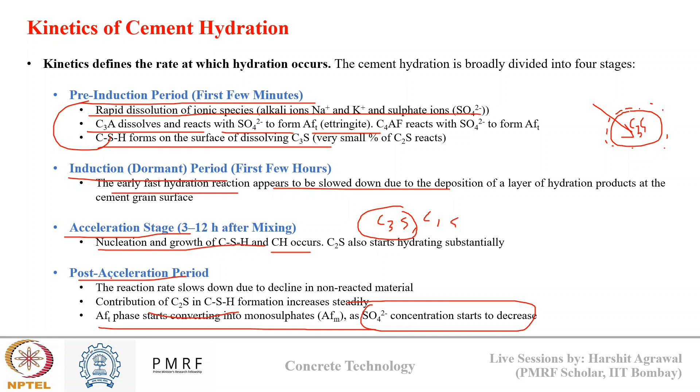Then there is the acceleration period, where there is a rise in osmotic pressure which breaks this semi-permeable layer, and there is nucleation and growth of CSH and CH. Now C3S, C2S also starts to hydrate, and then there is the post acceleration period where C3S hydration has almost completed, but C2S hydration gains speed. So there is more contribution of C2S to CSH formation. And if gypsum is consumed, we'll see that ettringite starts to convert into monosulfate as gypsum quantity starts to decrease. So this is how there are four different periods in hydration of cement.

So suppose I have different hydration phases, C2S, C3S, C3A, and C4AF, and I give you this chart with dormant period, acceleration stage, and post acceleration stage. Can anyone tell me what these four curves will represent? What is this curve representing? Which phase it will represent? Which phase will the second curve represent? Which phase will the third curve represent? And which phase will the fourth curve represent, based on hydration time? So at zero, in cement, I added water, and there are four lines. Each of these lines defines one phase of cement. Can anyone identify what is one, what is two, what is three, and what is four?

So this first curve, what will be this first curve representing? Which phase - C3S, C2S, C3A, or C4AF? You can see the reaction of this first curve, it is starting just after the 1 hour mark, and then it is growing in the acceleration state, and then it is slowing down in the post acceleration state. So what can this be?

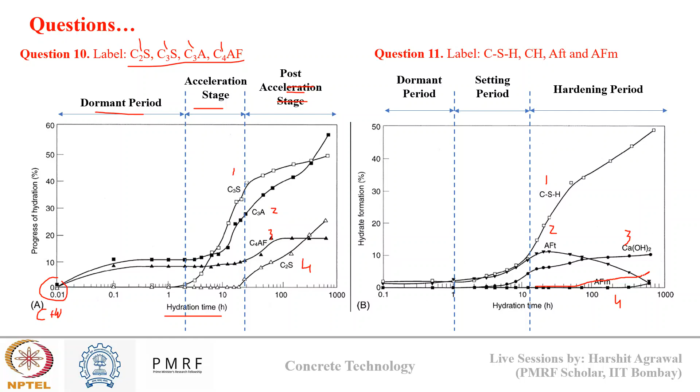And the fourth one will be AFM, more ettringite converting to AFM monosulfate. As ettringite starts to decline, monosulfate will start to rise. So this curve should be like this - from here it should increase like this. Clear with the hydration from oxide compound composition, how they are changing over time, and the final hydration product, how they are changing over time.

Just answer this one more question - what is the order of reactivity? I have C2S, C3S, C3A, and C4AF. If I want to rank them in terms of reactivity, which is the most reactive and which is the least reactive? Very simple question. Okay, C3A is the most reactive. And which one is the least reactive? C2S will be the least reactive.

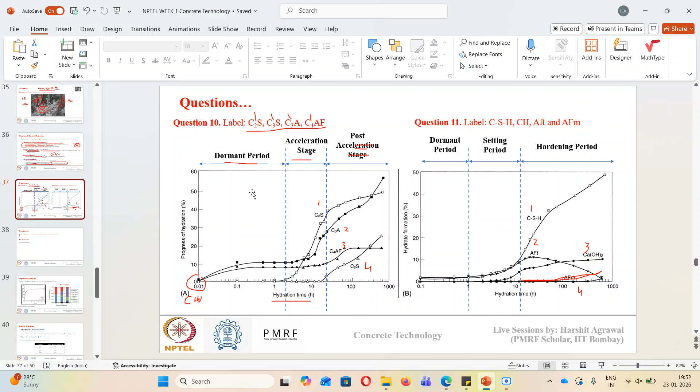These simple questions are generally asked in your assignment, and to have better clarity you can revise these two questions - that will completely clear your kinetics of hydration. These two diagrams will give you all the clarity that you need for these four periods that we discussed here.

Now let's move towards the final segment for today's discussion, and that is about two important properties of cement hydration, which are heat of hydration and degree of hydration. Why are these two properties important? Because they are the things that actually matter to us from an application point of view - these terms help us choose among various types of cement for an application purpose. So first we have degree of hydration, which is the measure of how much water has reacted with cement. It is the fraction of cement mass hydrated at any time. Now we know cement hydration is a long process.

It continues for a long period. That's why we can see in the first figure how hydration, after the initial steep rise, continues to increase steadily at a steady pace till 28 days. So the degree of hydration is the amount of water that is consumed by the system.

Initially it is very high, then it slows down, and hydration continues slowly. At 28 days we generally say that more than 90% of hydration that should have happened will happen. However, this statement is not true when we add mineral admixture to the system. Why? We'll see later on, around week 3 or week 4, that mineral admixture starts to hydrate when CH is produced by OPC.

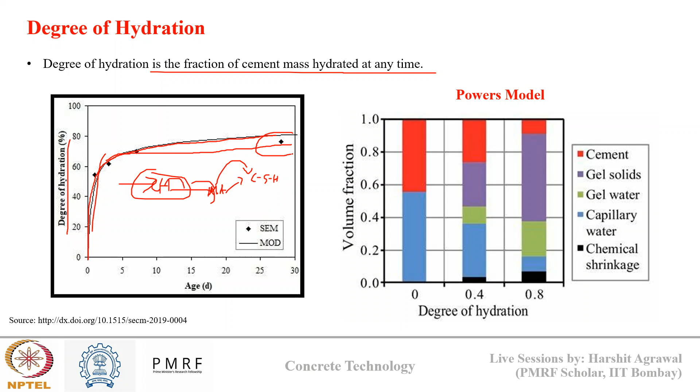So the CH that is produced by OPC is consumed by mineral admixture to form CSH. This CH production takes time, then consumption is done by mineral admixture, and then CSH will form. So instead of reaching 90 to 100% hydration limit at 28 days, for mineral admixture, hydration can grow up till 120 days also. So this is degree of hydration.

Now in the second figure, you can see the volume fraction of unhydrated and hydrated cement after different times. At 0 hour, you see there is capillary water, that is free water, and cement which is unreacted. After 0.4 hour, you can see the water content decreased. There is gel water, which is reacted water present between cement hydration products.

There is gel solid, which is the hydration product CSH, and there is unreacted cement, which is now decreased in proportion. Then again, over time, water again decreases. There is more gel water in the system, trapped between CSH gel. There is more CSH formation, and lower quantity of unreacted cement. This is known as hydration. The amount of water that is still unreacted, or that has been reacted, defines the degree of hydration of the system.

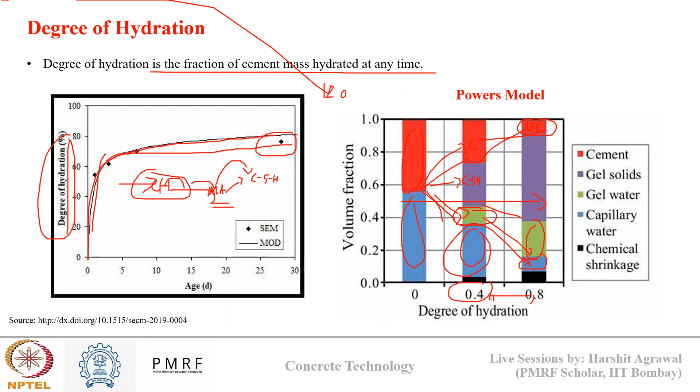After degree of hydration, we have heat of hydration. When we talk about cement hydration, we should remember that it is an exothermic reaction. It liberates heat when water is added to cement. As hydration occurs, heat is liberated from the system.

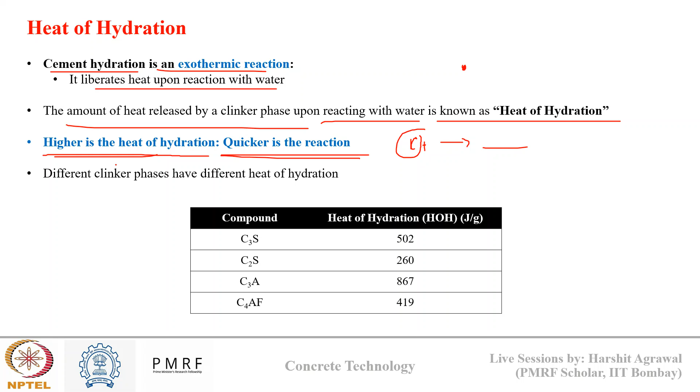The amount of heat released by a clinker phase upon reacting with water is known as heat of hydration. Since heat is released during hydration, higher the heat of hydration, quicker is the reaction, because more cement is reacting, more heat is produced. That's why finer cement, having more surface area, can react with more water, so it has higher heat of hydration and more exothermic reaction occurs in fine grains.

Different clinker phases have different heat of hydration. C3A has the maximum heat of hydration, then C3S is at the second position, then C4AF, and the least heat of hydration is of C2S. Why? Because C2S is more stable compared to C3S and C3A, so it takes time to react with water, and that's why its heat of hydration is lower, since it reacts slowly. While C3A reacts rapidly with water, so its heat of hydration is also high.

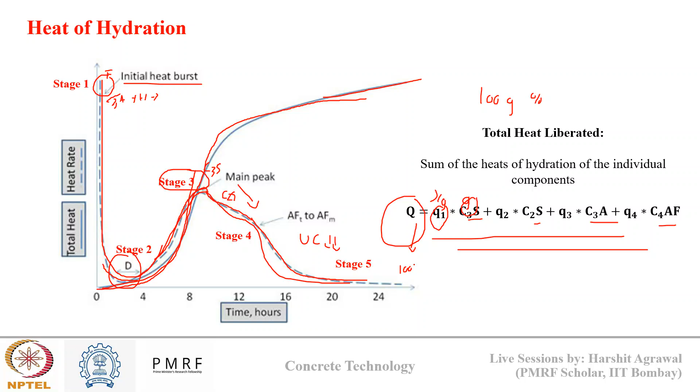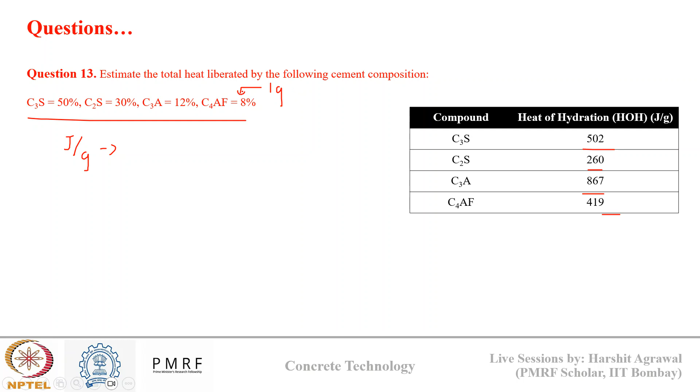So just give it a try. You know the heat of hydration of each phase, and you know the percentage of each phase. What will be the heat of hydration in terms of joule per gram? Suppose I have 1 gram of cement — what will be the heat of hydration for this 1 gram of cement composition? Can you even do this calculation?

I got a report for heat of hydration which mentions that it is 367 kilojoule per kg at 7 days of concrete — how is it lower compared to the data you have shown? I have not shown any data for concrete heat of hydration, I'm just sharing the data for certain different phases.

This is about how much C3S has heat of hydration per gram. Now you're talking about 367 kilojoule per kg of concrete. So in 1 kg of concrete, what is the proportion of cement? Suppose per kg you had around 300 grams of cement. In that 300 grams, check the proportion of C3S, C2S, C3A and C4AF, multiply that proportion with these values, and calculate the total heat of hydration of the system.

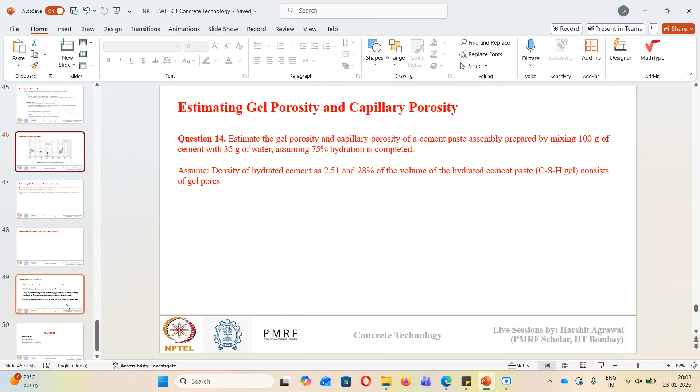This is the last slide we'll discuss. I had more slides regarding water and pores inside cement paste, but that will take place in the next session, because based on that I have numericals which are very important for the course. We will start the next session by discussing water and porosity in cement paste. So just solve this question, and then I will end the session and make myself available for any further doubts.

Did anyone do the calculation? So total heat of hydration will be 0.5 into 502 plus 0.3 into 260 plus 0.12 into 867 plus 0.08 times 419. It comes out to be 466.56 joule per gram.

When we vary the proportion of cement — in the next session or the one after, we'll talk about different types of cement — you will see these proportions vary, and the total heat of hydration liberated by different cement systems will also vary. In hot weather concreting, we want cement with lower heat of hydration; in cold weather concreting, we want cement with higher heat of hydration. So we can judge this from the composition — according to different weather and different needs, the heat of hydration can change, and we can judge that from this calculation.